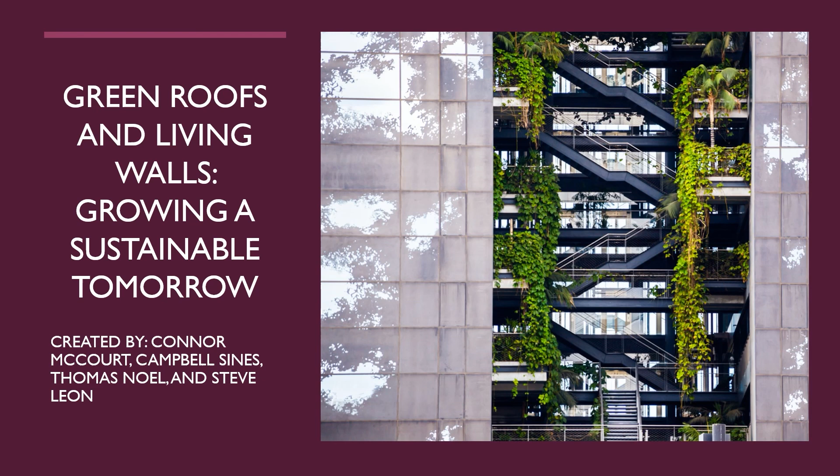Hello, everybody. Today we are going to be talking about the concept of green roofs and living walls. I'm going to give you an in-depth analysis of this idea and then also give you the aspect of how this relates to the overall concept of sustainability.

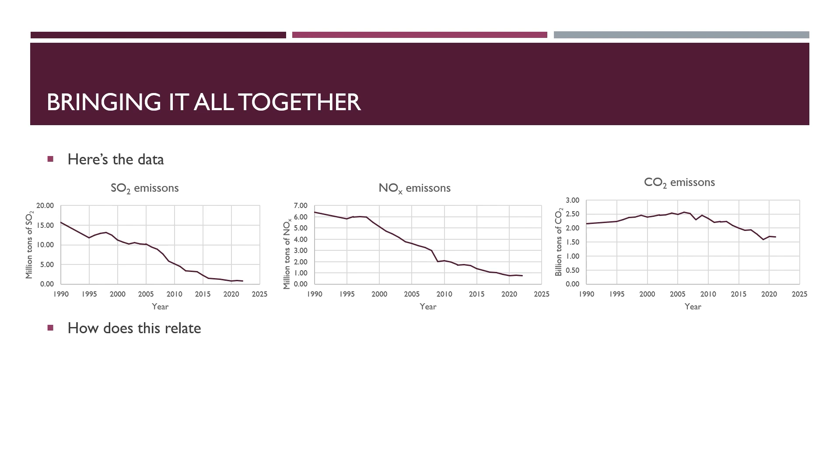So, what are these green roofs and walls? Green roofs are one of the main ways by which living systems can be incorporated into building design. Green roofs are composed of a waterproofing membrane, a growing medium, and various forms of vegetation. The vegetation on the roofs can vary from plants and grasses to small trees.

Just like green roofs, green walls are made up of a medium that has been attached to a wall with plants attached to it as well. The plants on green walls can be low maintenance decorative plants or may even be edible plant species. Green roofs and green walls are essential components of integrating living systems into building design, promoting sustainable and environmental benefits.

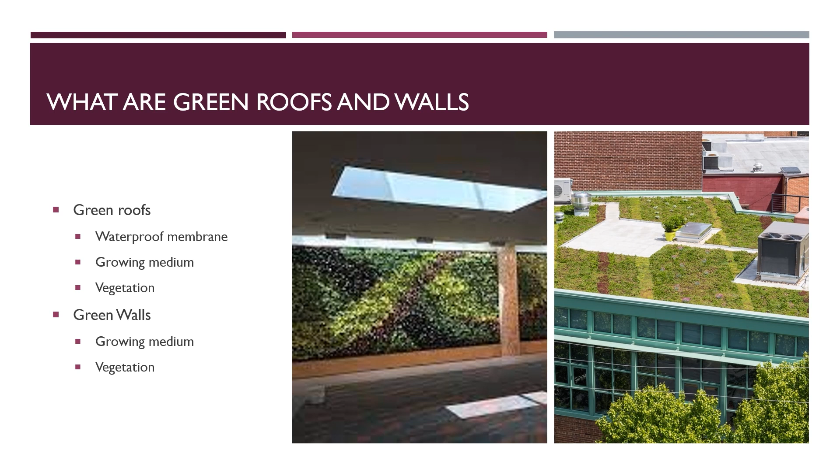The two main types of green roofs are intensive and extensive. They each have their own benefits and uses that should be considered prior to their installation. Intensive green roofs, for example, have a greater depth of the growing medium, which allows for a greater variety of plants to be used, like trees and other large plants.

Intensive green roofs are usually designed with aesthetics or recreational purposes in mind, which means that they require more maintenance than extensive green roofs. Intensive green roofs are also heavier than extensive ones, which may cause the need for the installation of additional structural support to the building, especially the roof.

Extensive roofs are usually designed with the intent to prioritize environmental benefits such as improving biodiversity, managing stormwater, and improving energy efficiency. Since the growing medium is less deep, only drought-resistant plants such as grasses and hardy herbs are usually used when installing extensive green roofs.

Extensive green roofs, however, are much more cost-effective when compared to intensive green roofs, since they require much less maintenance and almost no modification to the building. As you can see below, there are two examples of what intensive versus extensive green roofs might look like.

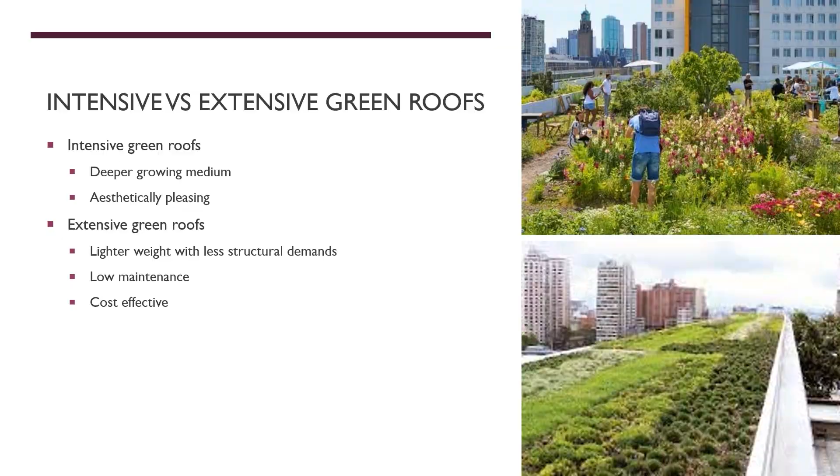So, how do green roofs work, and what does the water retention aspect look like for these? Green roofs are thoughtfully designed to excel in water retention and management, relying on two primary components: the growing medium and vegetation. The growing medium is a specialized lightweight medium, typically comprising a blend of soil, organic matter, and lightweight aggregates. This engineered medium is adept at absorbing and efficiently retaining rainwater, serving as a preventative measure against

excessive runoff, and its unique composition effectively retains water, akin to the behavior of a sponge. This capability significantly alleviates the pressure on stormwater drainage systems, emphasizing the eco-friendly nature of green roofs and water management. There are also other aspects that we can look at. Instead of making a spongy-like medium, we can also create mediums that are more filter-like, and that can lead to more discussions about rainwater collection that we will show you in just a moment.

Rainwater capture is something very applicable to green roofs and could definitely allow for more access to clean water. Our video demonstration will showcase how vegetation serves as a remarkable filtration system and water retainer, and encompasses the entire essence of green roofs and walls. So let's roll the video and see how this natural solution can transform our urban landscapes.

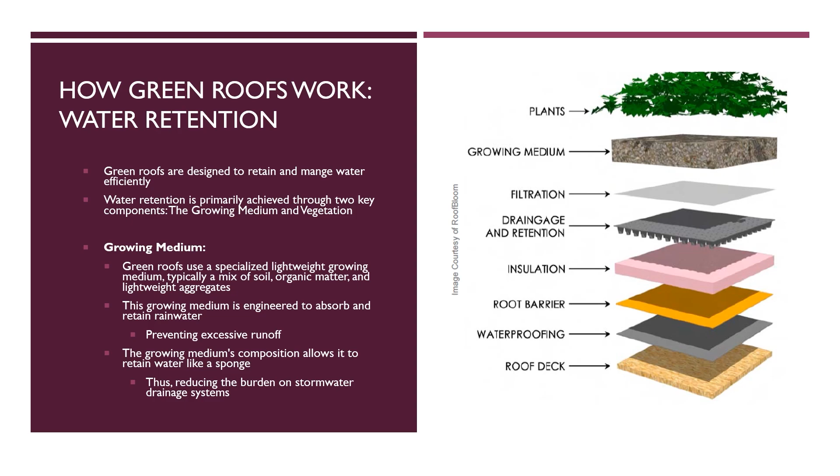So, how exactly do these green roofs work? One pivotal role that we can discuss when choosing our green roofs is the choice of vegetation. Vegetation is very important, and it significantly contributes to the water retention efficiency. Typically, succulent and drought-resistant plant species are favored for their exceptional performance in this regard, and these plants retain water by absorbing it and subsequently releasing it gradually through the processes of transpiration and evaporation.

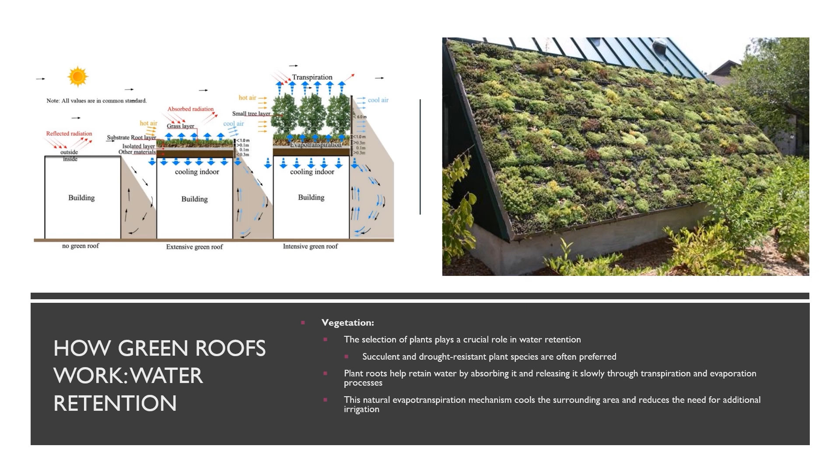This natural evapotranspiration mechanism not only aids in water retention, but also has the added benefit of cooling the surrounding environment, reducing the demand for additional irrigation. So let's show a little example of how these could be impacting our impact on the environment. It's through insulation. Thermal insulation is very important to reducing emissions because there'd be less energy used in that regard.

Both the growing medium and the vegetation themselves serve as effective insulators. This insulation not only enhances the overall comfort of the building, but also plays a pivotal role in temperature regulation. This reduces heat gain and subsequently lowers the cost associated with indoor cooling. It also helps minimize heat loss, thereby reducing the need for additional heating.

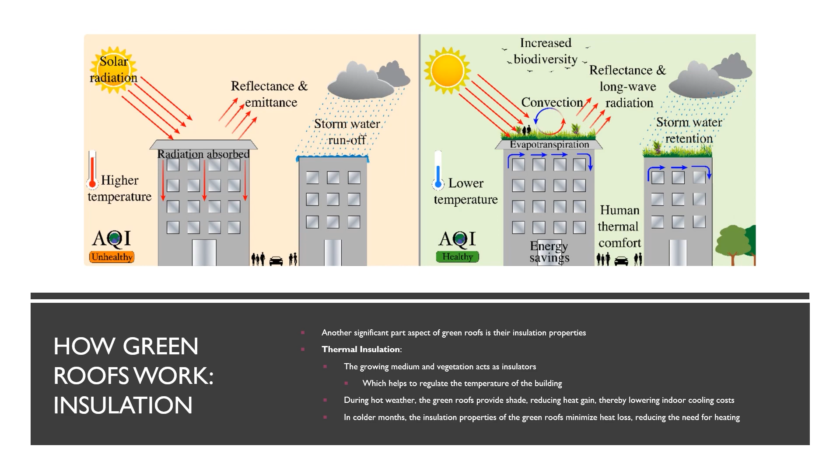So here's some additional information about how these green roofs and green walls work. Green roofs provide multifaceted benefits, including acoustic insulation, energy efficiency, and environmental benefits. First, I'm going to talk about the acoustic insulation, which is exactly how you might picture it. It's green roofs acting as an effective sound insulator to reduce external noise in an urban environment that may be very important to people. It works together to dampen sound and results in a quieter indoor environment.

The energy efficiency, again, comes into play when we think about the thermal insulating. The water retention and insulation properties make green roofs exceptionally energy efficient, and research has indicated that green roofs can significantly decrease energy consumption. And the environmental benefits extend their positive impact beyond individual buildings, playing a crucial role in mitigating the urban heat island effect, helping to balance temperature extremes in densely populated urban areas. Additionally, they support local biodiversity by creating habitats for various plants and insect species.

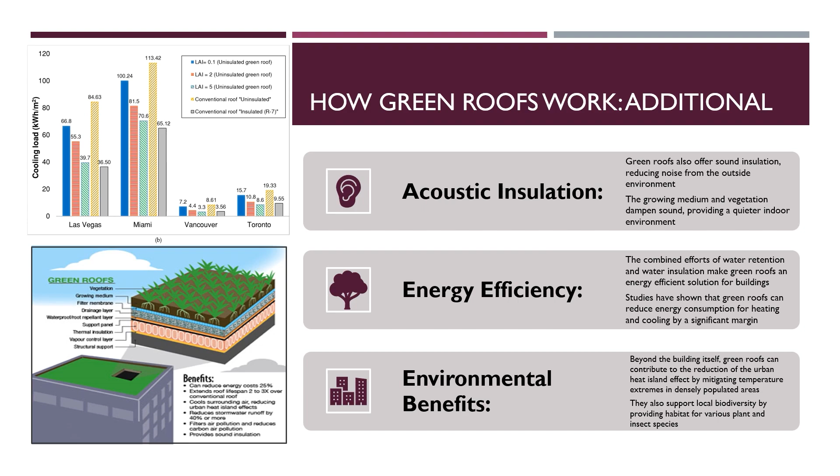So the selection of plants also plays a very large role in terms of what exactly the plants are doing. If we're talking about heat absorption and reflection, there are many different plant species that exhibit varying heat behaviors. Some absorb and retain heat, which helps maintain a warm roof surface, while others reflect sunlight and heat, keeping the surface temperature lower. These microclimatic variances have a direct impact on the surrounding environment.

There's also something we have to worry about called transpiration and evaporation. Plants contribute to temperature moderation through transpiration, where they release water vapor. Subsequently, the evaporation of this water vapor from the leaves, known as evapotranspiration, cools the surrounding air and reduces the roof surface temperature.

So, dark-colored or densely vegetated plants tend to absorb and retain more heat, which makes sense, as light-colored plants with reflective surfaces such as silvery gray foliage or waxy leaves tend to reflect sunlight. Some examples include white clover, lavender, sea thrift, and sempervivum for the light-colored plants with reflective surfaces.

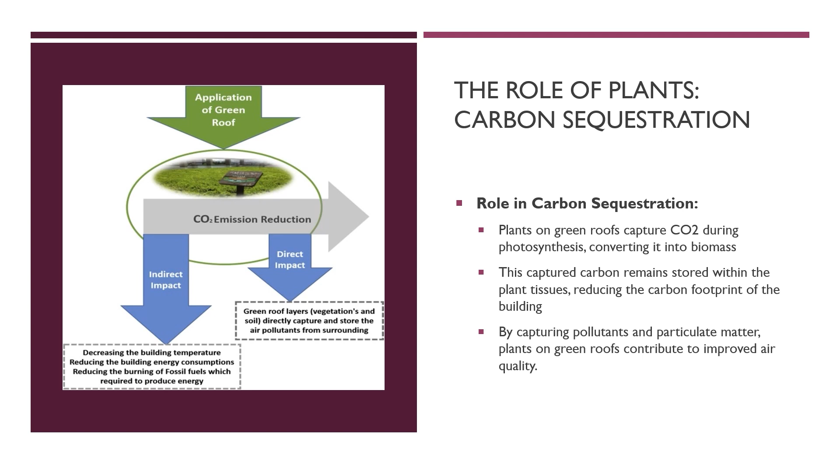So there is the aspect of maintenance and care that we have to think about in regards to green roofs and walls. Weeds can compete with desired vegetation and affect the visual appeal of green roofs and walls, so regular weeding is necessary to keep unwanted plants in check. Some plants may require periodic pruning to encourage healthy growth.

These things are very, very simple to people who may garden, but we also have to look at how trimming maintains a desired shape. Just for aesthetic purposes, that's not for everybody, but green roofs may require supplemental irrigation if the water retention is not good enough, or even if you're in a dry environment.

And sometimes there are aspects where fertilizer may need to be applied. That quickly runs into a problem if we have to follow guidelines to prevent runoff, or even when we think about the aspect of collecting rainwater. As with any garden, green roofs and walls may have plants that just naturally reach the end of their life cycle, and replacing these dead and dying plants is essential to maintain the desired aesthetic and functionality of these green roofs and walls.

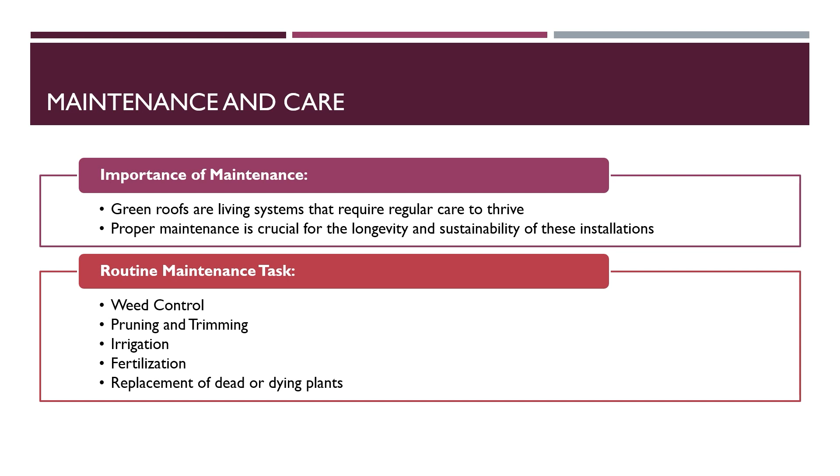So there's a lot of different types of green walls. Green walls, often referred to as living walls, are vertical architectural elements adorned with thriving vegetation. These living installations are primarily employed for their aesthetic appeal, but also their air purification capabilities and sound insulation properties, as with green roofs. So the types of green walls include green facade, biofilter, modular, hydroponic, and interior green walls.

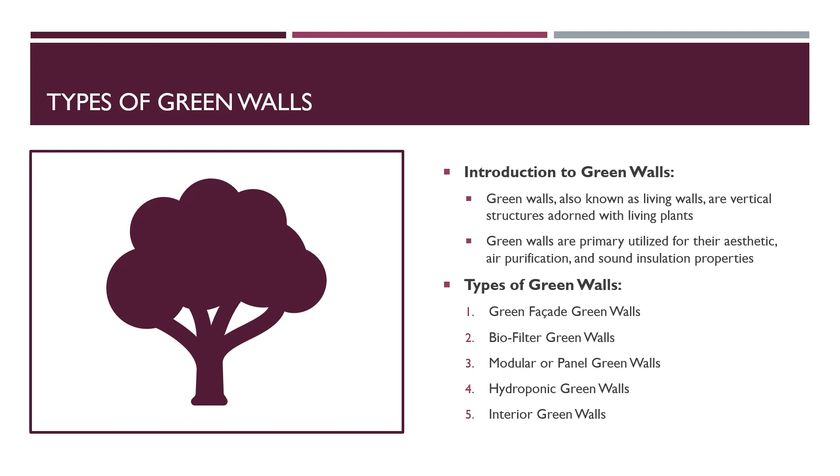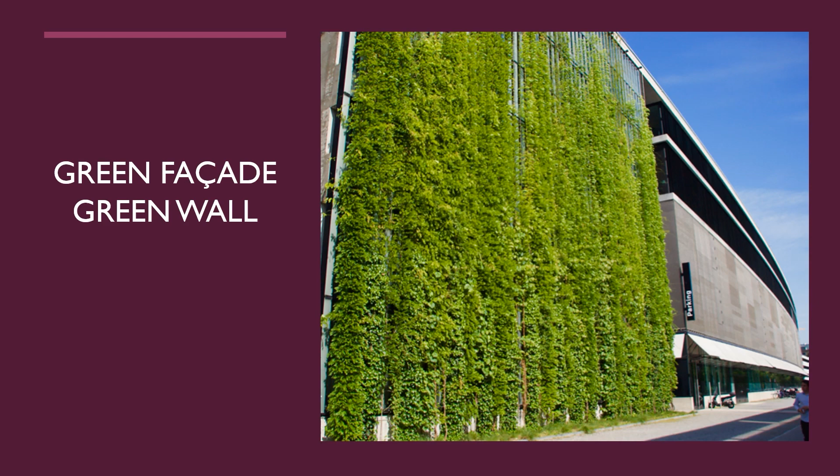So another type of wall we can look at is biofilters. These biofilters are fit with plants that are very good at purifying pollutants. These pollutants can involve formaldehyde, benzene, and volatile organic compounds. Biofilter green walls contribute to improved indoor air quality, obviously, and have numerous other health benefits.

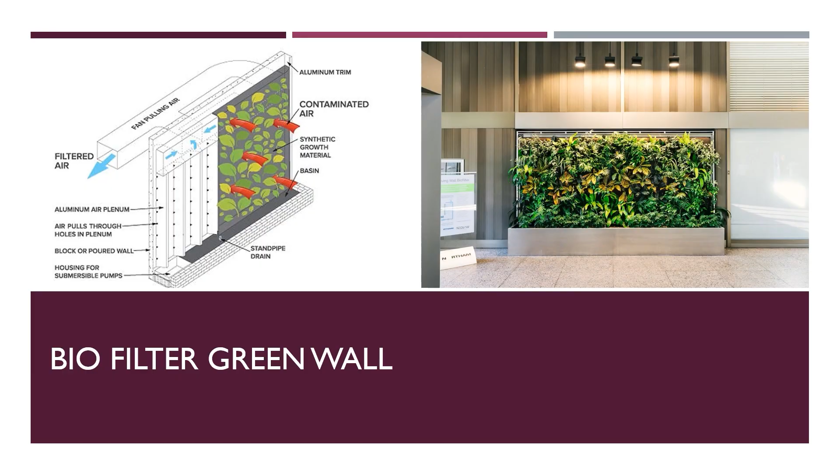And so we also have what are called modular or panel green walls. These can be installed indoors or outdoors. The plants are pre-grown in plant panels, which are then mounted onto a structure. They're versatile, easy to maintain, and suitable for various environments.

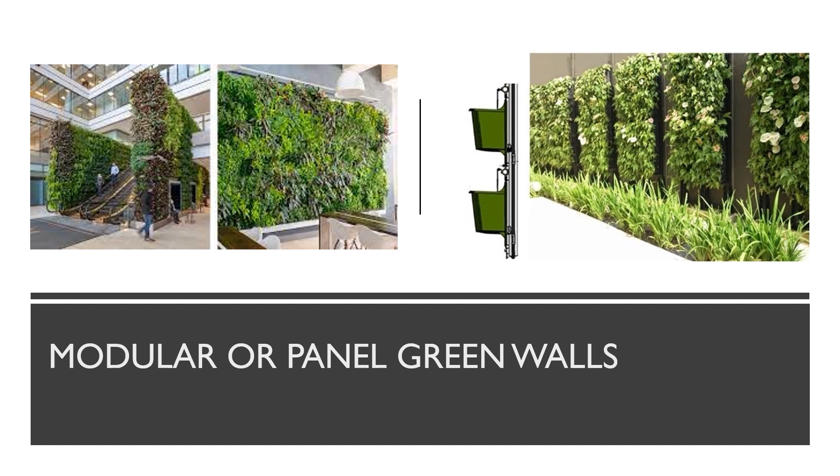The other one is hydroponic, which, as it sounds, is something to do with water. So these utilize a system with a pump to transport nutrient-rich water to travel through these plants. These are very space efficient and definitely efficient in water and nutrient usage. They are suitable for outdoor applications, but we do normally see these types of installations inside.

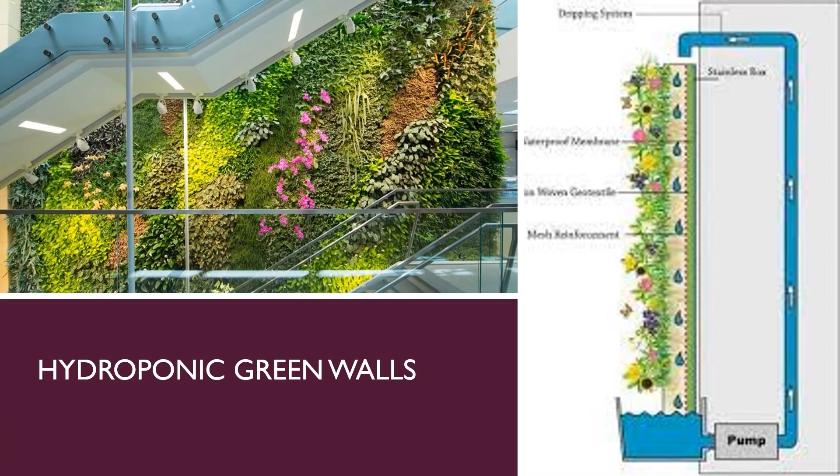And lastly, we just have interior green walls. They're just designed for indoor spaces. They enhance aesthetics and air quality and may not have as many other benefits. I see these as being more aesthetically pleasing. They use, again, hydroponics or soil-less growing mediums. And that's it for the types of green walls.

What is the urban heat island effect? Well, let's dive into that a little bit. Urban areas often experience elevated temperatures compared to their neighboring rural regions, primarily due to human activities, concentrated infrastructure, and extensive pavement. This climatic phenomenon, known as the urban heat island effect, not only leads to increased energy consumption, but also contributes to various heat-related issues.

Green roofs and walls do act as cooling agents for us, so they do play a vital role in combating the urban heat island effect. They achieve this by reducing surface temperatures through natural processes like transpiration and shading. In effect, they create cooler microclimates within urban environments.

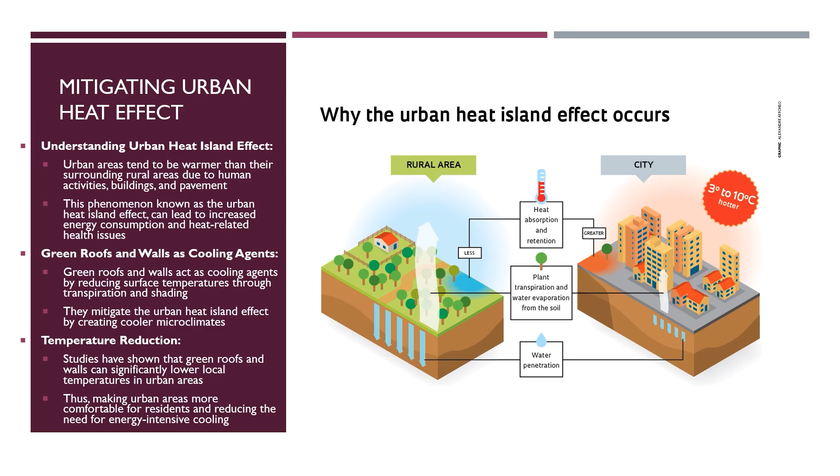So let's take a look at some real-world examples, as there are very many. Here are just two. So the High Line in New York City boasts stunning green walls adorned with a rich variety of thriving plant species. This visionary project has not only transformed the urban landscape, but has also made notable contributions to urban aesthetics. It's been a great haven for biodiversity. It creates overall appeal and property value increase in the surrounding neighborhood.

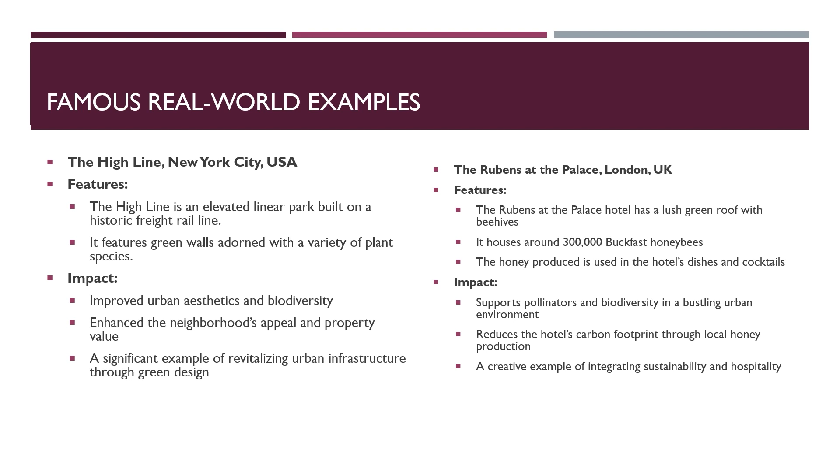There are definitely some challenges to consider when looking at green roofs and walls. This can include weight load, waterproofing and leak prevention, water management in general, and the type of plant selection and any problems that come with maintenance in the plants. So first, the structural integrity of the building has to be assessed in order to support the additional load. Obviously, modular systems and lightweight growing media can reduce the load. And this is definitely more of a problem with green roofs than it is with green walls.

And with any roofs, you have to think about leak prevention. Regular inspections need to happen in order to make sure that there's no leaks and to address potential issues before they become major problems. And with the water management, you really just have to make sure you incorporate proper drainage systems and manage excess water. This is important in general with sustainable practices because we don't want to be using more water than we have to.

And the plant selection also will vary from climate to climate, obviously. You always have to consider factors like soil type, sunlight, wind exposure, when making all these plant choices, which can be very difficult and may need a certain degree of expertise to do so.

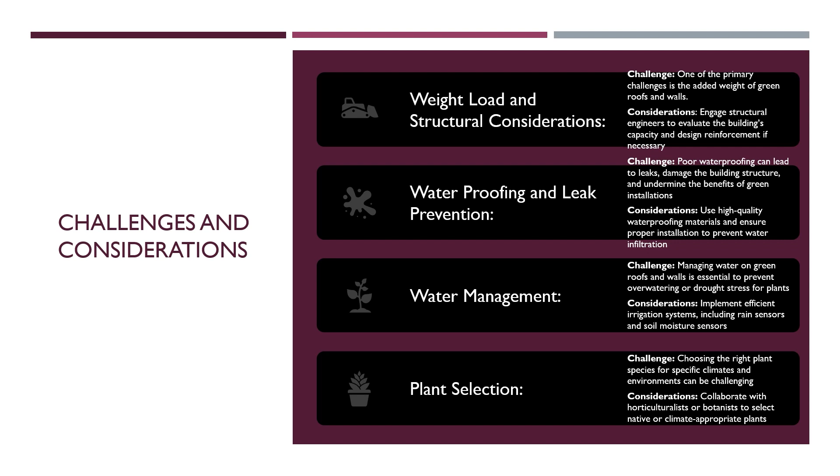I think we can all agree about our final thoughts based on this video that green roofs and walls are a sustainable practice and can contribute positively to urban development. These practices can also provide solutions for mitigating climate change. And overall, they're very pretty and aesthetically pleasing and can definitely impact the lives of people who have to spend their entire lives in urban environments. The future is green, and this is a very good stepping stone into the ever-changing possibilities to maintain a sustainable urban future.